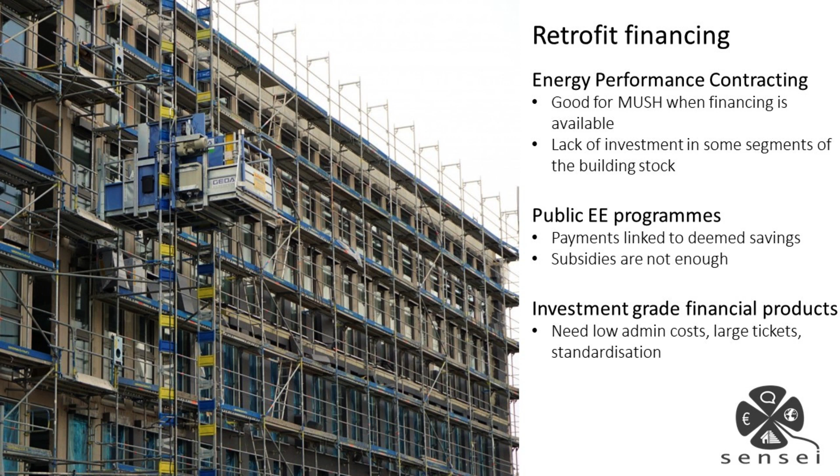So first of all, let's see what SENSEI tries to do as a project. We want to investigate the use of these pay-for-performance schemes to see how to aggregate retrofit projects, improve the effectiveness of subsidy programs, and make energy efficiency something valuable for the grid as an alternative energy resource.

And we see that there has been already quite some traction, at least on the policy level, both in the Renovation Wave, where pay-for-performance schemes have been mentioned as a potential to attract private intermediaries, and also in the EU Save Energy communication from spring 2022 as a possible way to trigger further investment. So there's already a political drive, and we expect pay-for-performance schemes to be gaining still further influence on market actors in Europe.

Basically, what we find in our project is that these schemes could be putting a price on energy efficiency, being very accurate at measuring savings, and this can improve existing subsidy schemes, allow the aggregation of projects to trigger larger investments, and of course recognize energy efficiency as a valuable addition to the power mix.

We were inspired by quite a lot of things in the US. I will allow Dimitria to mention more on this, but the activities that our colleagues from the US have made are quite inspiring and are helping us in Europe as well.

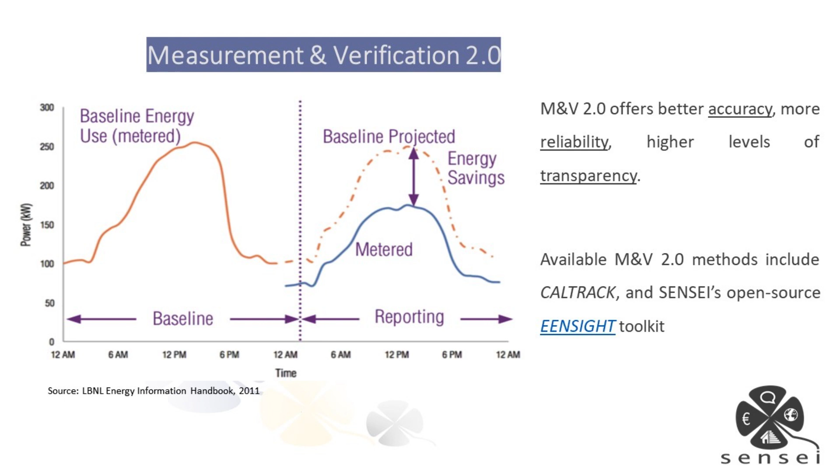So what can we actually build based on that? This is a very basic scheme in a way, but it allows us quite a good conceptualization of what could be happening. And I'll spend a bit more time on this. It's the main aspect of this brief presentation.

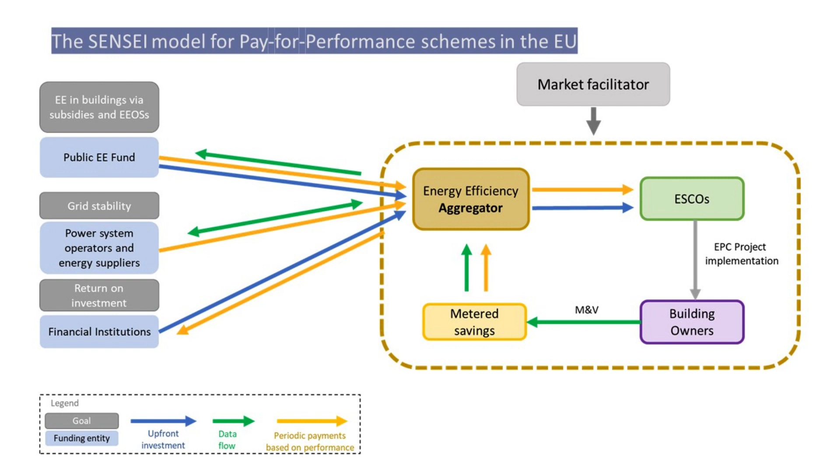So I would like to offer an example of how this could actually take place. This is the example of using energy efficiency as a demand-side energy resource. And I will go step by step of the various steps that could take place. This is a theoretical system, by the way, based on what's happening in the US. So we could have an actor in the power system, and let's say this is a DSO that issues a tender for aggregators and asks them to reduce the overall energy demand from the grid or from a specific location.

One of these aggregators can be successful in their bid and has this bid where they can go to financial institutions, get the necessary financing to then invest to ESCOs and buildings. What the aggregator can then do is also take data from the DSO, look at which buildings are the ones that are better suited either in terms of location or consumption or building characteristics. And then in partnerships with the ESCOs, go and target these specific buildings that offer high potentials for energy savings or because of their location in the grid, and that can be beneficial to, for example, avoid building new substations or putting in new wires.

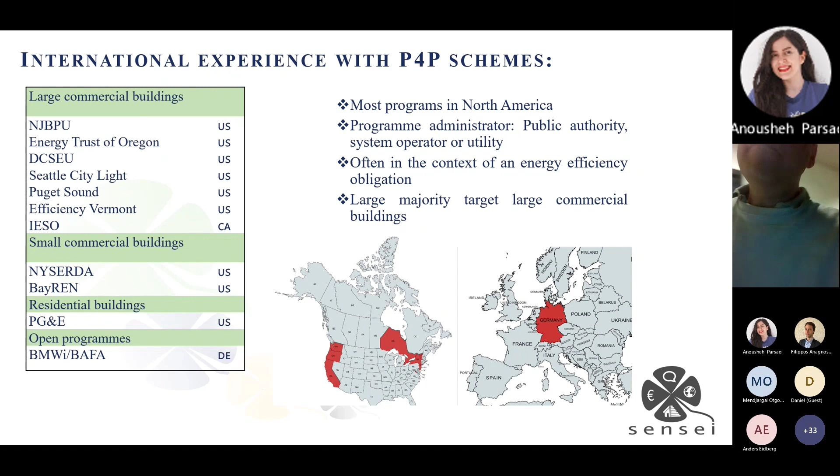Another key finding was that the majority of these schemes mainly included large commercial buildings, but there were also some small commercial buildings in NYSERDA and BayREN, and at that time, the only residential one was PG&E in California. However, recently we identified that another pay-for-performance program was launched about 2 years ago by NYSERDA and the National Grid system operator in New York, trying to have a residential pay-for-performance program using the CalTRACK methods.

I will not dive into these M&V methods because Sotiris will analyze them more. And also by embracing an aggregator model of P4P. Just to have an idea about the schemes, these are the 2 residential schemes, the one administered by PG&E and the one administered by NYSERDA and National Grid.

NYSERDA is a state authority, so it is not a utility or a system operator. As you can see, they do not really get the grid benefits, but they are the facilitator with the payments and the savings, working between the M&V operator, Recurve, and National Grid, which is the grid operator. PG&E, on the other side, cooperates directly with Recurve in the California scheme.

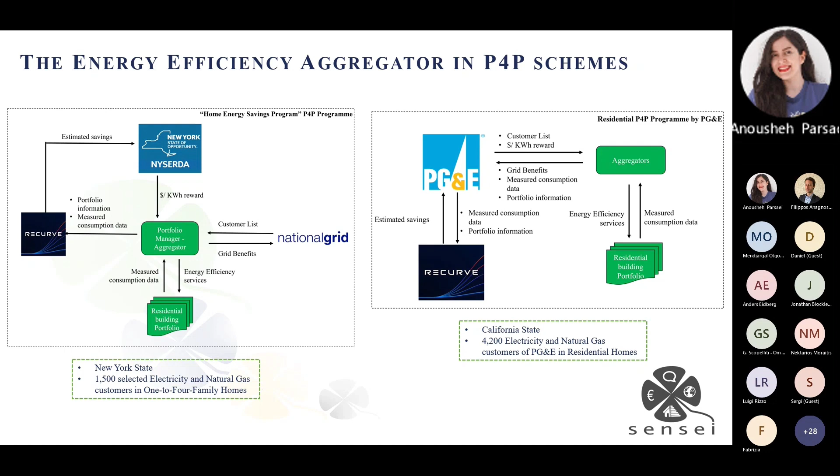Another very important thing to highlight here is the role of the aggregator in both schemes. Since they target the residential sector, so we talk about very small households, it's really important to have an aggregator that aggregates all these single projects into portfolios. This is mainly it for the schemes. What we did then was to try to identify, from the actors we identified in the US, how these actors could work in the scheme here in Europe.

Filippos already, I think, explained this very well, so I don't want to spend more time on this here. And I would like to present the different monetary relations and financial risks between the traditional programs and P4P programs, because many of you, when we discuss it, ask, okay, what is the difference for customers or for the program administrators when we're talking about a traditional program or a P4P program?

One main difference for the customers is that they receive upfront incentives most of the time in traditional ones, and it might seem scary when in P4P programs they will get it only on the verified savings. But the truth is that in most of the cases, the aggregator or the energy provider is taking the low performance risk and not the customer. So it isn't as scary as it might seem to most people.

For the implementers, ESCOs, aggregators, or other service providers, they have a greater risk, but they also can target more sectors like the small and medium enterprises and the residential one. And in case they do not perform, they may receive lower payments, or they may have to do more actions in order to achieve additional savings.

Thank you. Not so much for small enterprises, but to address the previous question about DSOs: it's the energy efficiency first principle. We hear a lot about it, but it was never materialized or substantiated before. Now with the new revisions we have a new article making it more strict—the first thing you have to do before any other decision is make your building super energy efficient.

When you practically take this into consideration for all your buildings, even small and medium enterprises, every decision will start with: I have to do the energy efficient action first. So a strict energy efficiency first principle, like a stick in this case, will be very important to promote schemes like on-bill schemes, pay-for-performance schemes, and all these new mechanisms we are researching.

The public sector will also be very important, because it's easier to start and try such schemes there—national, public buildings. It's easier for them to take the risk and start with public funding, testing what works and doesn't, before moving to harder sectors like residential or small and medium enterprises.

The final point, for buildings and small medium enterprises, is minimum energy performance standards. I know it sounds harsh and many will be against it, but the stricter the standards, the more demand we create to find the most cost-effective way to do these things. If we want to take action, I'd like to know all the savings I have are verified and actually implemented, and that I have a better EPC class. So mainly this from my side—I hope I answered. Thank you very much.

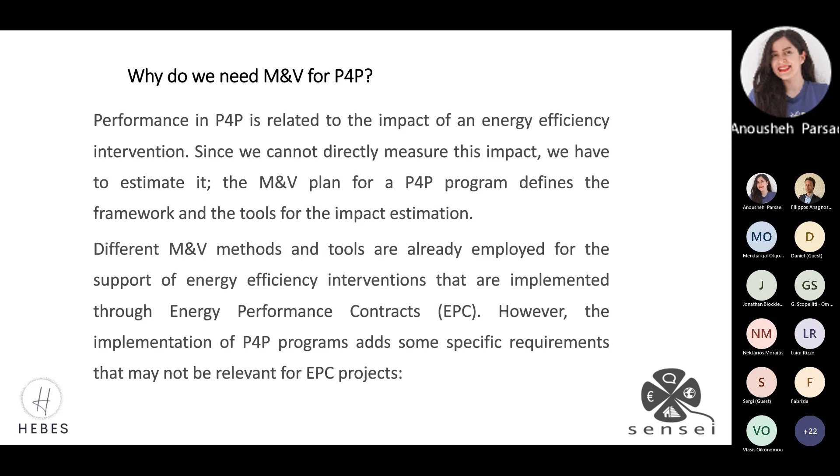What changes in pay for performance is that you need to upscale it. Things that work well for one building may not work that well when you have a portfolio of buildings. Specifically, three aspects are important here. First, you want as little human in the loop as possible. You don't want people sitting down creating detailed models of a building. This makes sense for individual buildings, but the moment you aggregate and create portfolios, this is expensive.

The second thing is that you want to adapt to changes. Things change inside the building, and you want to capture and correct them. With individual buildings, maybe you have the luxury to go inside, see what's happened, discuss with the building owner, and find a way to update the model. The more you move away from the building and only see a portfolio, the more this process has to be automated.

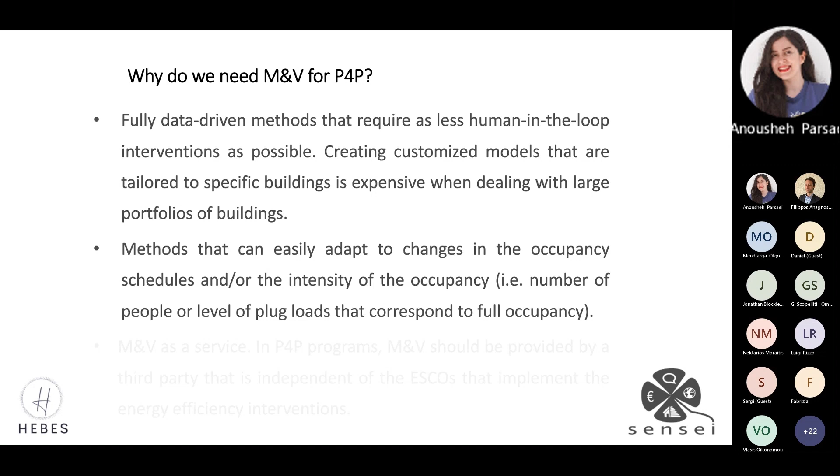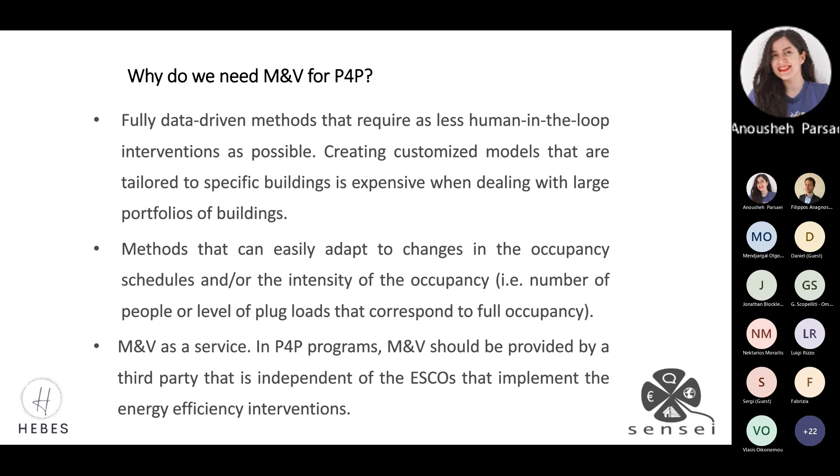And the other thing is that practical M&V should be something completely separate from the ESCO that implements the upgrade, in the sense that it should be a trusted source of information shared among all the participants in the portfolio. So, what are the project's contributions regarding measurement and verification? We started with a specific deliverable, initially meant to review what already exists. It turns out that what exists, or at least is open and checkable, is not that much. So there was scope for creating new things.

Practically, there is only one model, the time-of-week and temperature model. It's quite an old model. CalTRACK, which was mentioned, is a biased version of that.

Anyway, we developed an initial version of the eensight tool, based on predictions, how to improve predictions for energy consumption. We had discussions and model tests with people from Vivo, and at some point we revised the model and methodology because we found out that prediction can only get you that far. At some point you have to treat M&V as something different than just predicting consumption, because it really is a different problem. I will mention the book at the end also.

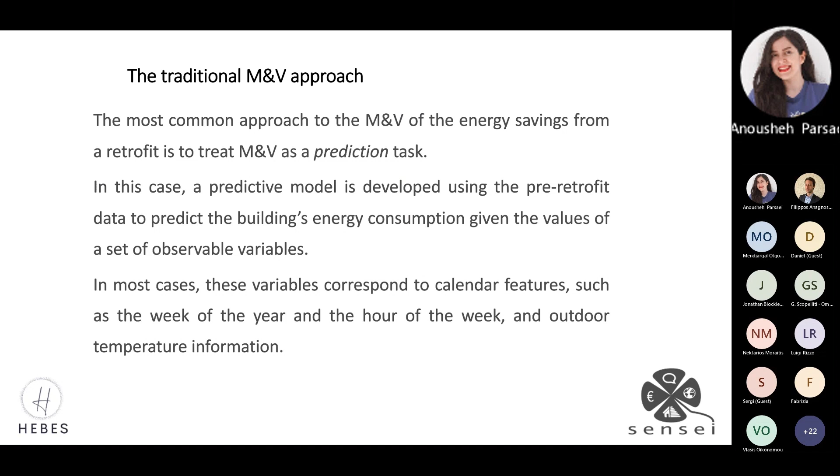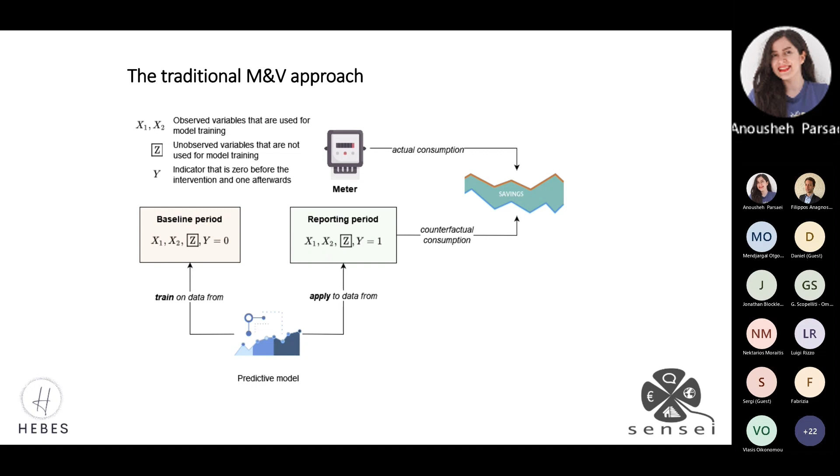How you can address it - IPMVP has some ideas like the chain method, where you try to update your model all the time, which creates a large chain of models, which is a bit problematic. But anyway, this is a nice way for me to explain the traditional approach.

And then we say, okay, for the second version, let's do something different. Let's approach M&V as something that tries to compare before and after intervention, similar states and similar conditions. The moment you have similarity between before and after, comparison will give you the impact - the difference that can be attributed to the intervention. So we have this idea of mapping variables and impact variables.

Maybe it's just to very fast go through them. Mapping is anything that should be similar before and after, so I can compare - that's all it is. These mapping variables, such as weather, must be similar before and after. Occupancy schedule must be similar. Density of occupancy, how many people I have at full occupancy, for instance - this must be similar to compare. And if this changes, I must be able to adapt automatically.

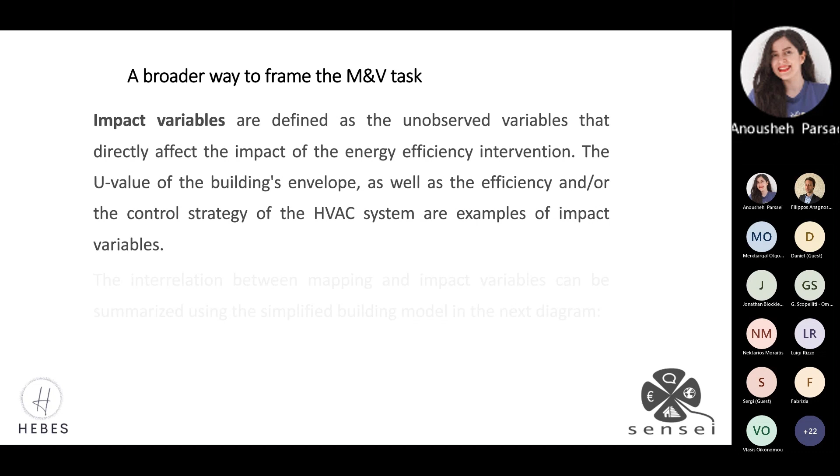And then there are the impact aspects that you have to capture. You don't want to adapt to the changes - you want to capture the impact of the changes, like the U-value of the building's envelope, etc.

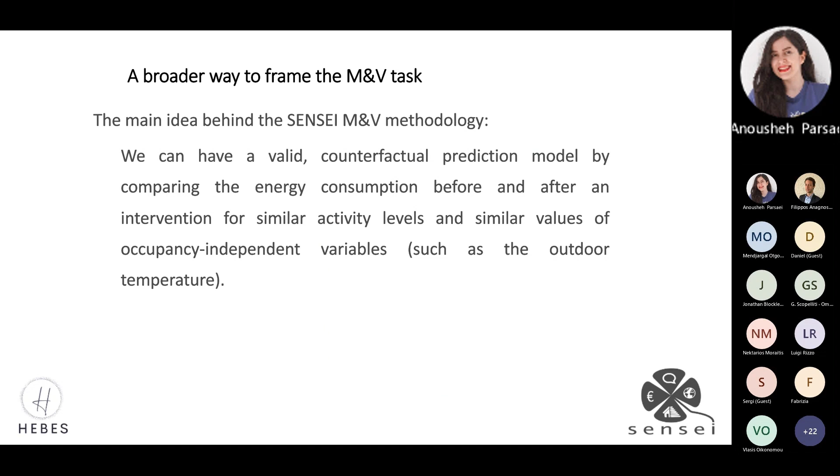So what is the idea behind the methodology of SENSEI? You can have a very valid counterfactual model by comparing before and after conditions - similar conditions in terms of activity levels. And this is the left part, the activity levels and occupancy-independent variables.

One way to describe it, maybe it's too technical anyway, you can think of it as an autoencoder. An autoencoder is a fancy word to say that you have a model that takes something, creates a new feature, and then reconstructs that something. And that can be consumption - so you have consumption, it uses it to create a new feature, that's activity, and then it reconstructs consumption.

This is something that says, I'm trying to learn from both the data before and the data after the intervention and try to combine so that I correct the model that has been trained before the intervention with what I see after. This is definitely not prediction, but it's similar or even better. And what I mean by that, this all comes from the book that I mentioned, that has a series of examples that try to demonstrate that A, it makes sense, and B, it's not something to be scared of just because you are combining data before and after.

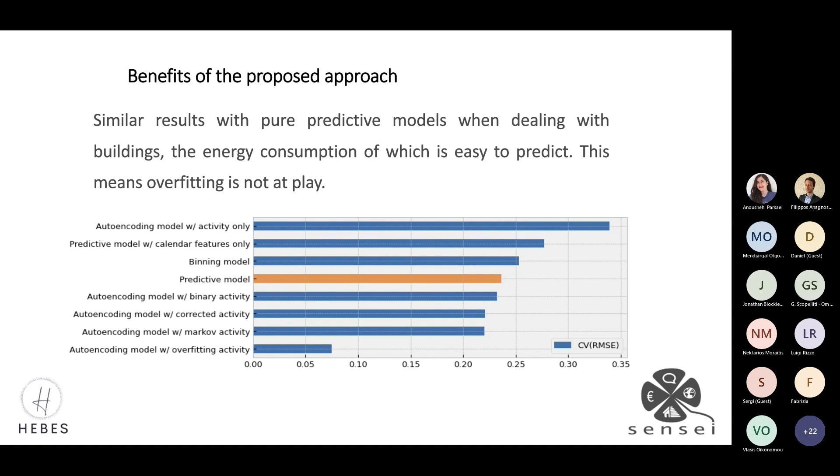And the yellow one is a pure predictive model. This is a very, very easy to predict building. So what you would like to see is that this approach comes close to it, but it's not artificially well. The last one that says with overfitting activity is an overfitting model. Overfitting models you cannot trust. So we can actually get that close to that, yes, which means it's safe to use it. Doesn't overfit means you can trust it.

By the way, if you treat it as a predictive model exclusively, because you can use it like that, it's also not that bad. If you take the data from the EVO portal, you will see that it's close to the best models. There's nothing in the left. All the others are to the right. So it's quite good in terms of both bias and error.

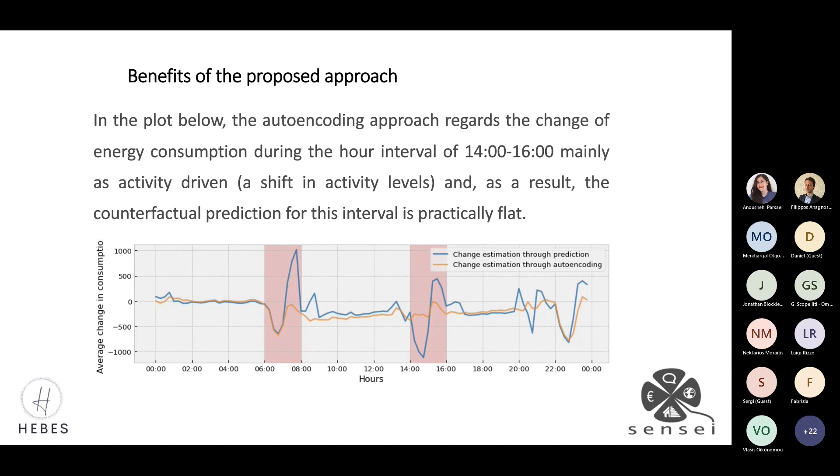One thing to keep in mind, two things. First, what we get from that? We ignore changes that can be attributed to activity levels. If the model sees a change in energy consumption that can be explained by a change in activity, it doesn't describe it as impact, which is something that you want. Okay, if I close my office and I don't go there, consumption goes down, but that doesn't mean that I have impact from intervention. I just changed my activity. So it adapts to activity changes.

It can also adapt to intermittent energy consumption, when it's very difficult to predict when you will consume. And there is an example in the book that shows it's easy to find what we should map before and after, and we demonstrate in the book that what it finds is actually similar to reality. It can also adapt to changes, like for instance fewer people inside the building because of something like the COVID-19 pandemic. If you see the plot, you have an area that happens before but not after. If you would say I want to map, how do I map? Well, it's smart enough to know what to map with and what to exclude.

So we have created a book that describes the methodology in detail, has a lot of examples. It tries to argue that it makes sense. This is its first page. And also the tool itself is free online for everyone to test it. And yeah, I think I'm done.

So how does this align with privacy concerns? M&V or the model specifically? The model specifically does not. M&V also is quite difficult to align with privacy concerns because you need data for consumption. If you say that from the data you can infer things like activities and routines, it is true. But then again, it's a trade-off. You need this information because you rely on understanding what happens inside the building in order to understand the impact of anything that changes through intervention. So the moment you say, I want to understand what happens, you affect privacy.

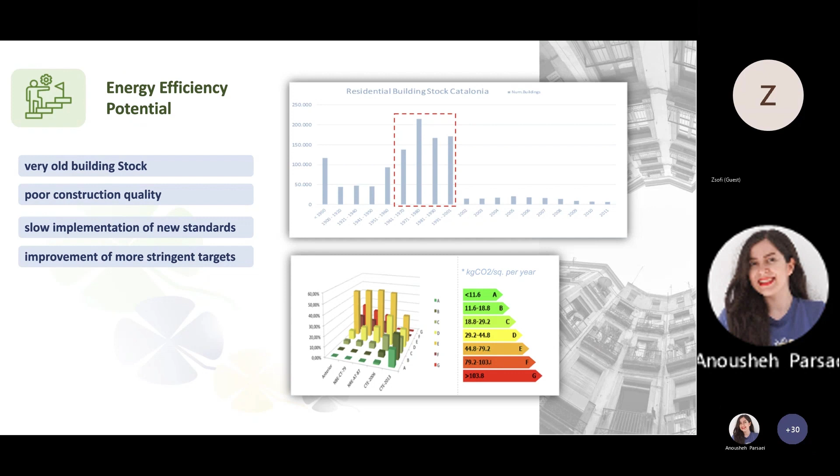Regarding the energy efficiency potential, these are the figures of the residential building stock in Catalonia. As is similar, I think, in the rest of Europe, we have a very old building stock, and the big problem is poor construction quality. The implementation of the new standards has been going very slowly, and probably we need to be more demanding on these standards.

Another thing we need to think about is the role of the aggregator. The energy efficiency aggregator doesn't only need financial skills, as Johan presented, but also has to know what happens in buildings. This entity needs information to identify which buildings are most suitable for specific programs and how to classify them. They need, for example, a tool like M&V or an energy efficiency measures catalog with enough information to calculate the energy efficiency savings potential, and the idea is to be more accurate between reality and future savings.

During SENSEI, we elaborated different deliverables, for example D4.3, elaborated by one of our colleagues, or D5.1. They estimate different indicators and study different methods to evaluate energy efficiency measures. All of this work tries to be a tool for the aggregator to classify buildings, perhaps by sector or consumption, and create what we need: this energy efficiency portfolio.

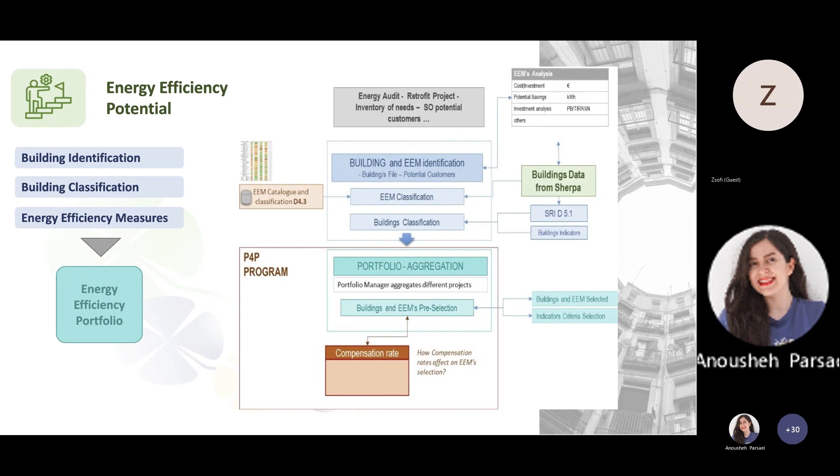Another important point when we design a P4P program is that the aggregator needs to know the compensation rate in advance, because in the end it will be specific information to calculate the return on the initial investment. I'll also go quickly through this slide.

What are our strengths? We have different laws. We have a climate change law. In Catalonia, we currently have an energy efficiency strategy in public buildings through 2022, and another one is going to be elaborated, managed by the Energy Agency, ICAEN. We also started to implement tenders through EPC models, and we have elaborated guidelines. At national level, there is also a similar energy efficiency fund, which gathers money from the DSOs and TSOs to promote renovation activities.

Another important actor in this model is the citizens, or the energy communities. They are more focused on renewable energy now, but we need to also include energy efficiency as an energy resource to the grid. We are also working on an energy transition law, but it's only a draft.

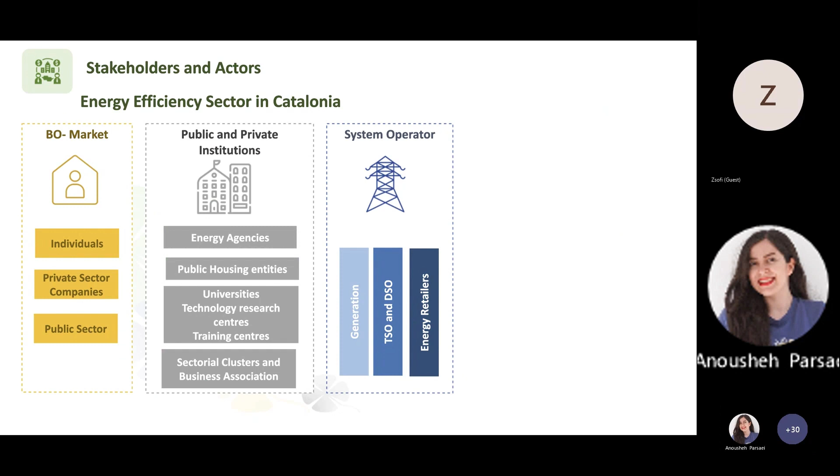Regarding the system operator, currently the TSOs have these obligations to pay this energy efficiency fund. Now there's the possibility, in the future, to work through certificates. And finally, the investment providers, as mentioned in other presentations today, and again the last actor, not only the end users, but also these services or facilities managers that are the last actor to make possible that these savings are achieved. For example, the technical chambers and professionals' knowledge is very important.